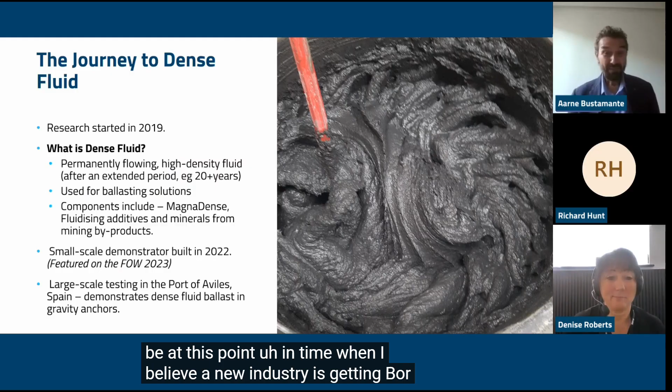It's really a pleasure to be at this point in time when I believe a new industry is getting born. I think in the energy industry, probably nothing is so attractive and has such high potential right now as floating offshore wind.

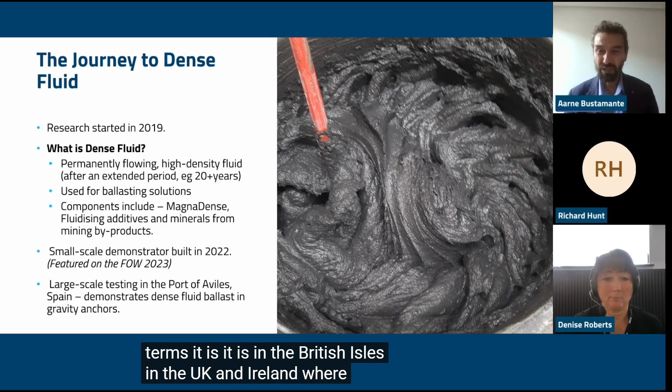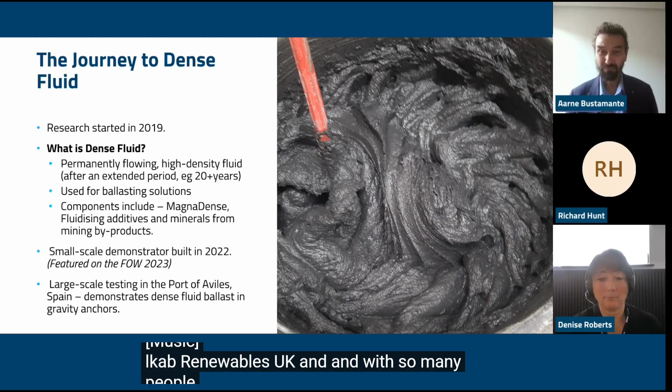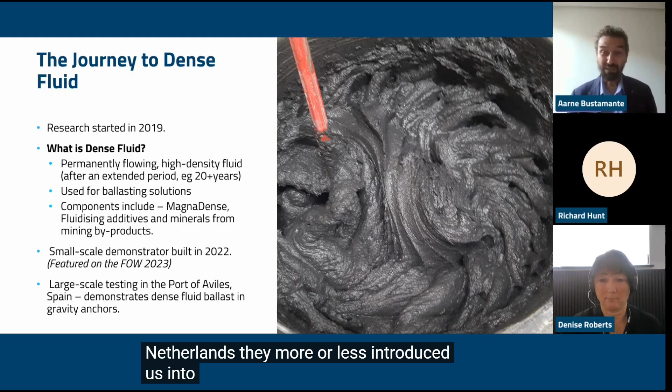I must say we have been in contact with LKAB since maybe 2018. Albert from Spain and Bas from the Netherlands more or less introduced us to LKAB. We have also been in contact with very many interesting people. Up there in Michigan, in the Upper Peninsula, Tim Scarlett is listening to this conversation, and he will probably be very interested because they have such great potential in Lake Superior, which will require floating wind. It's on a lake and not on an ocean, but still very interesting. So I'm really excited to be part of this.

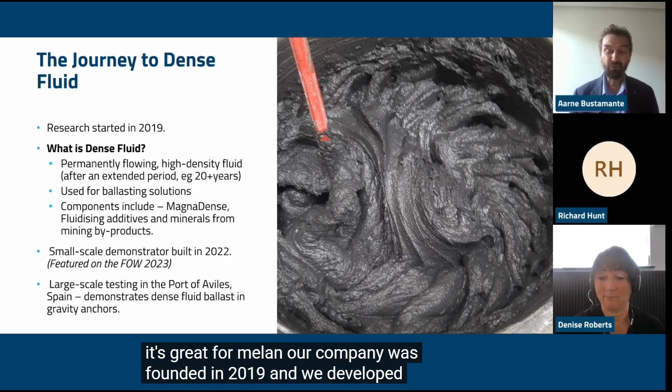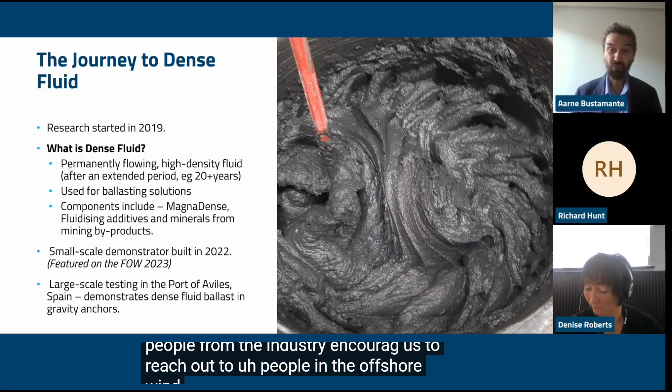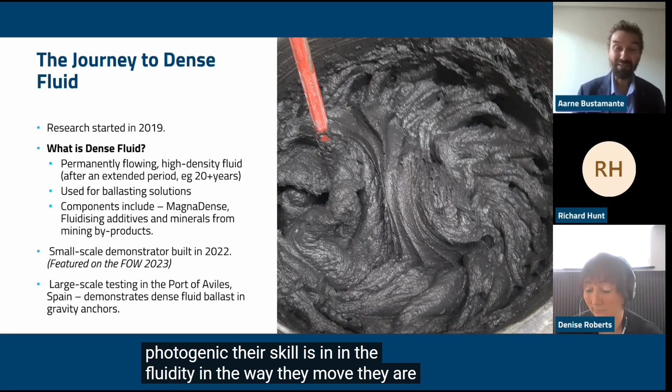It's great for Magellan. Our company was founded in 2019, and we developed dense fluids meant for something else, for energy storage. But people from the industry encouraged us to reach out to people in the offshore wind industry who could find a use for our dense fluids. There you can see an image of the typical look. I must say the dense fluids are not very photogenic. Their skill is in the fluidity, in the way they move. They are probably quite ugly, but they know how to dance.

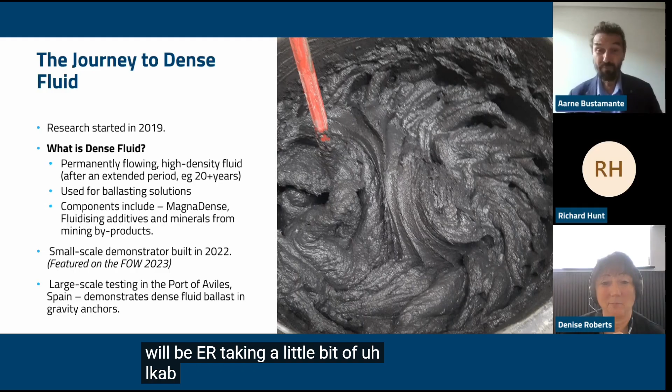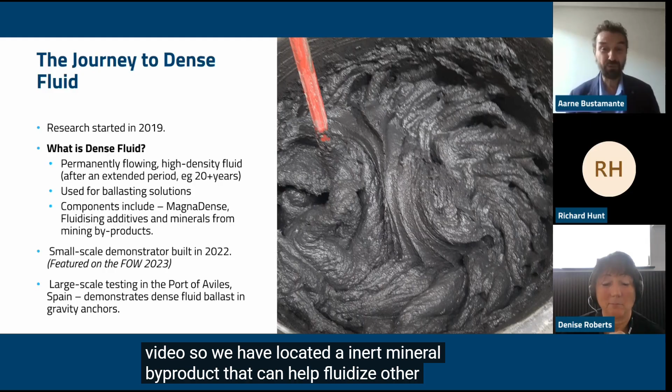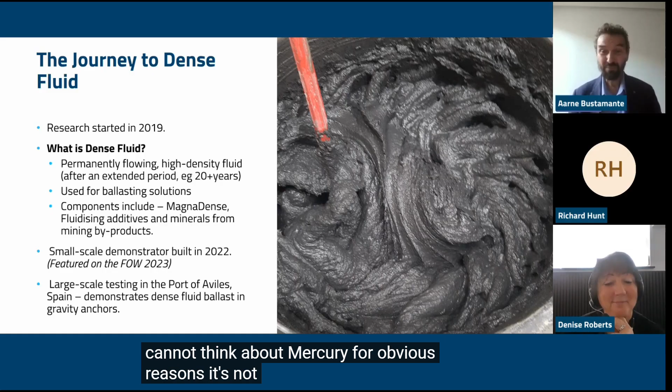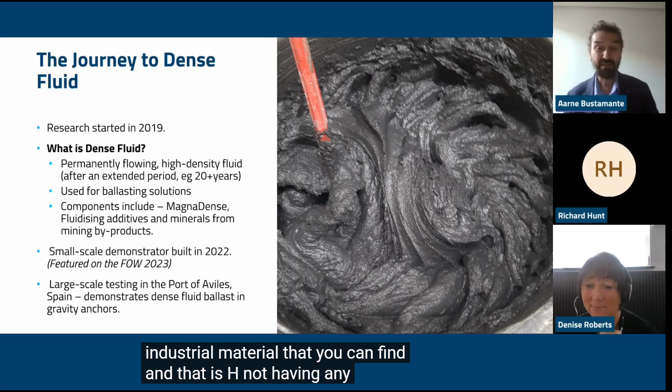So we have located inert mineral byproducts that can help fluidize other minerals that contribute density. Density and fluidity are a bit complementary. It's difficult to find a material that has both, except of course mercury, but we cannot think about mercury for obvious reasons. It's not an acceptable material. So of course, magnetite is a very interesting product because it's probably the densest highly used industrial material that you can find that doesn't have any environmental problems, because you can have lead or other heavy metals, but those are also not acceptable. So for us, it's very interesting to be able to fluidize the MagnaDense material.

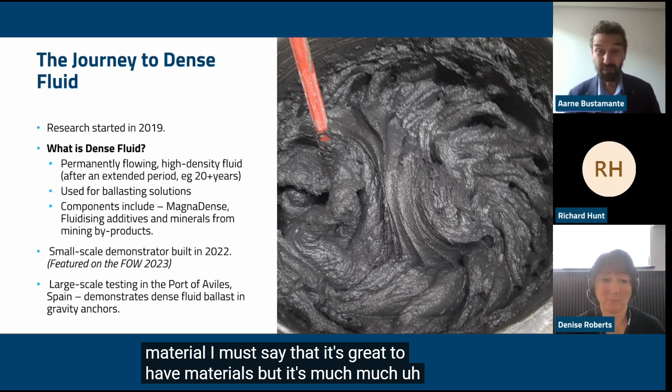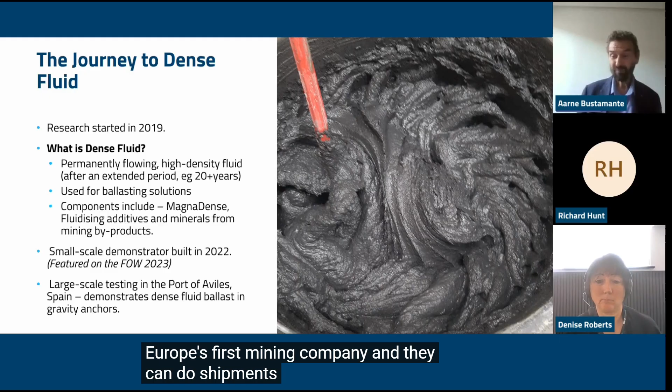I must say that it's great to have materials, but it's much better if there's a large mining company that's operating it, that knows how to handle the logistics. That's completely different. We actually have found some materials that could be good, but there's no mining company behind them, so you have to start from scratch with all the mining infrastructure, and that's a big headache and a lot of time and money. So we're happy to have found material that is very close to the port of Bilbao, and that means there will be a company that has already built the infrastructure and knows how to do the handling, much like LKAB. LKAB, of course, is Europe's first mining company, and they can do shipments anywhere. So we are at a happy spot because we can offer immediate solutions.

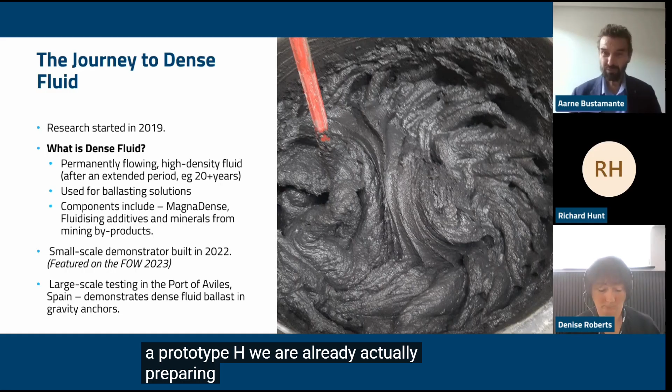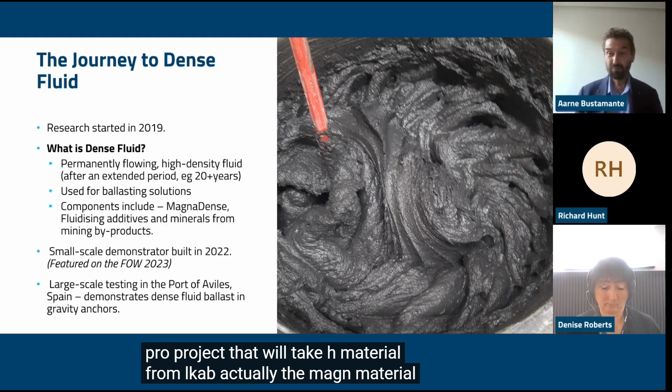If you have a prototype, we are actually already preparing shipments for next October that will go to the Canary Islands for an inner ocean project, and that will take material from LKAB, actually the MagnaDense material, that we will hold in place for 2 years and then extract as a fluid. So the first thing I want to make clear is this is already available. We still need to certify, we need to do some testing, but we can go into very serious discussions.

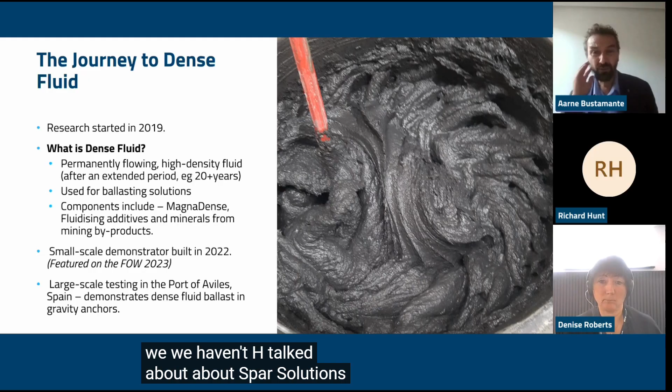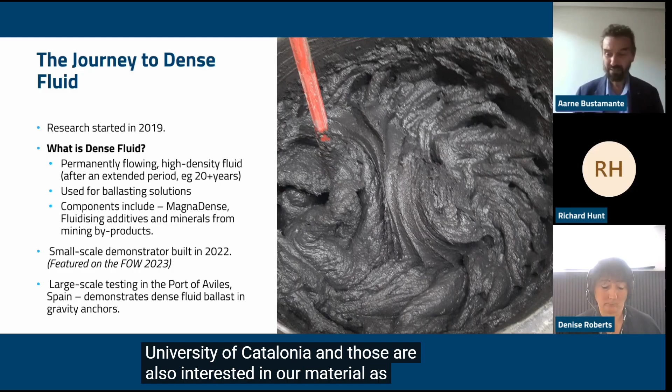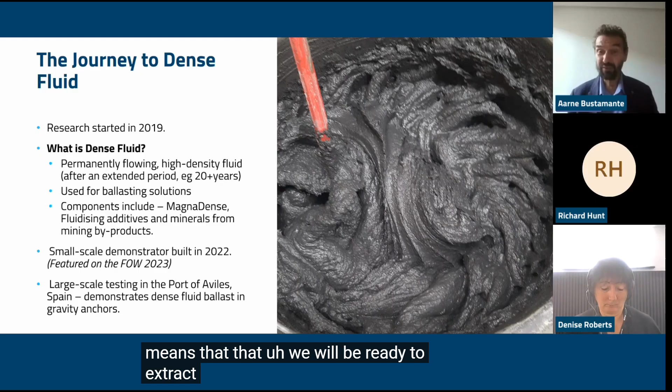We are, of course, very, very happy also to talk, for example, we haven't talked about spar solutions, but we are in contact with Windcrete and the Polytechnic University of Catalonia, and those are also interested in our material as ballast. I must say that when we talk fluidity, we mean, from our point of view, permanent fluidity. That means that we will be ready to extract the material as a fluid after maybe 20 years.

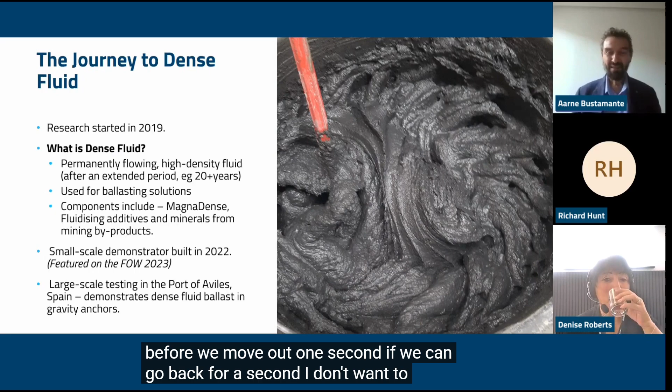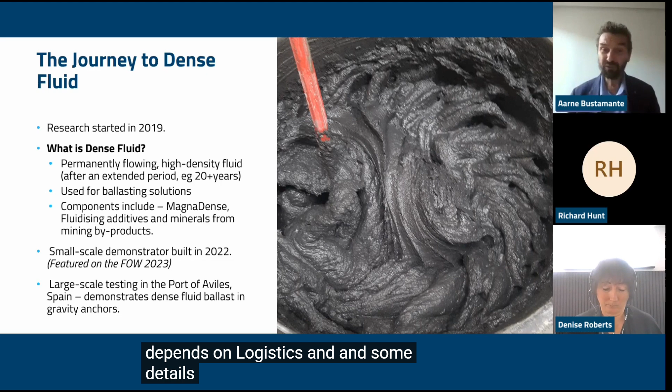And maybe we can move to the next, but before we move on, one second. If we can go back for a second, I don't want to forget: after the show in Aberdeen, we plan to do a large-scale demonstration in the port of Avilés in northern Spain. Maybe it will have to be in the Port of Bilbao. That depends on logistics and some details. But there we will try to demonstrate that we can install and extract material at 14-meter water depth in the port of Avilés.

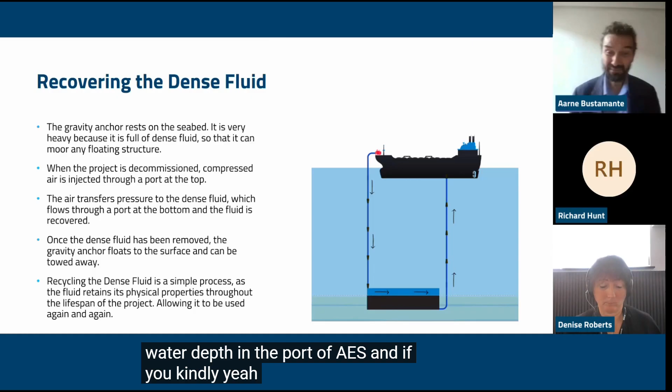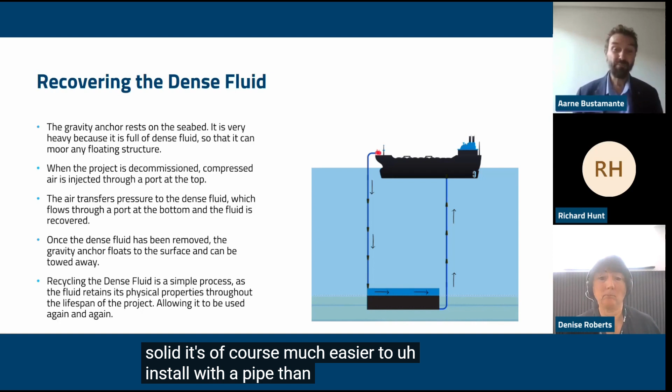And if you kindly, this is a drawing that explains what are the advantages of having a dense fluid instead of a solid. It's of course much easier to install with a pipe than use a marine crane, and it's also possible to use simply pressurized water or ideally pressurized air to bring back the fluid after the lifetime of the project.

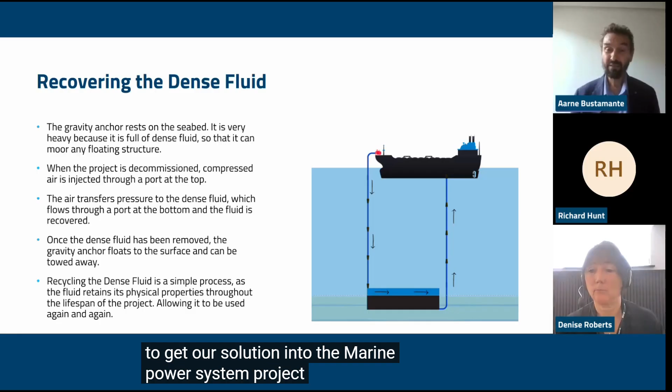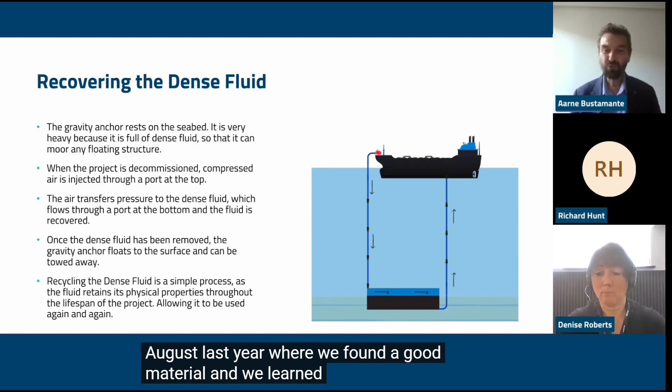I must say that we were trying to get our solution into the Marine Power System project that will be in Bilbao. That happened about April last year, and we were not completely ready. We made a breakthrough about August last year, where we found a good material and we learned to do the optimal blend. But we would propose maybe for future projects that a dense fluid is used instead of a solid.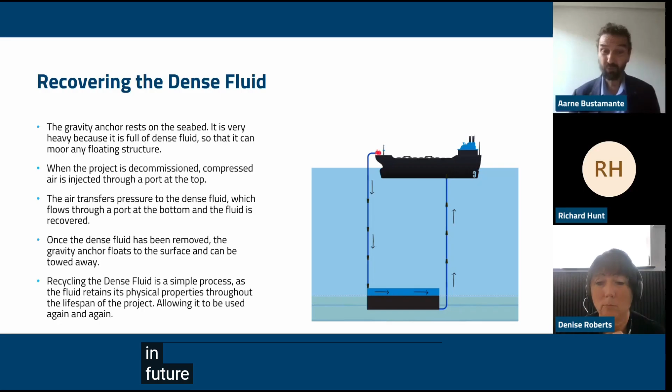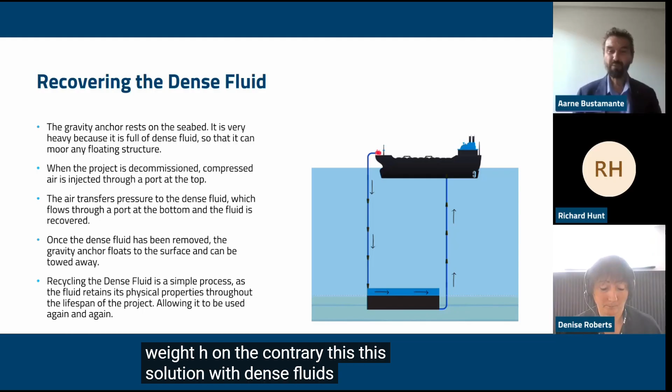Of course, the MPS project is a demonstrator at scale at 2 megawatts, but in future the turbines will be 15 or 20 megawatts. And that will make it probably a little bit more complex to use marine cranes to install the weights. On the contrary, this solution with dense fluids probably will scale much better because it's just a matter of pumping more time and of course more tonnage.

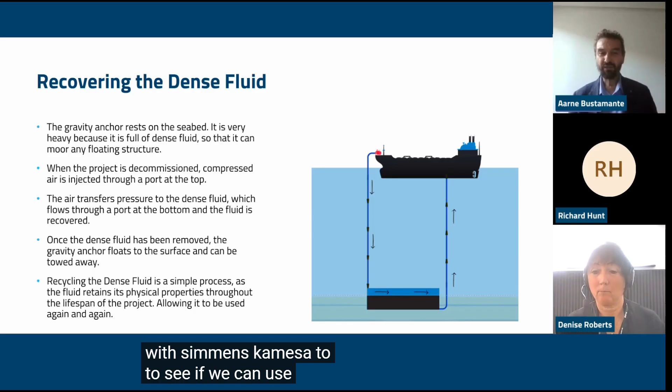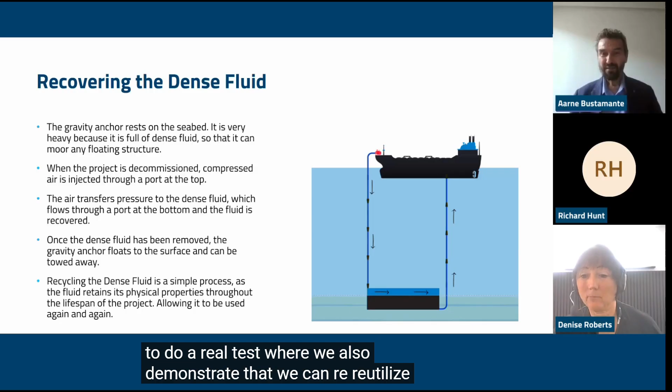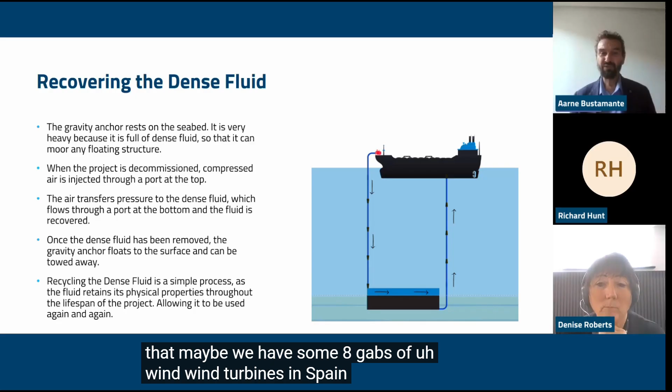So we actually are in contact with Siemens Gamesa to see if we can use one refurbished turbine tower segment from onshore to do a real test where we also demonstrate that we can reutilize segments of onshore wind turbines for this application. We have to keep in mind that maybe we have some 8 gigawatts of wind turbines in Spain that are approaching their end of life. So that will be many tower segments that are already built and ready to be used for other applications.

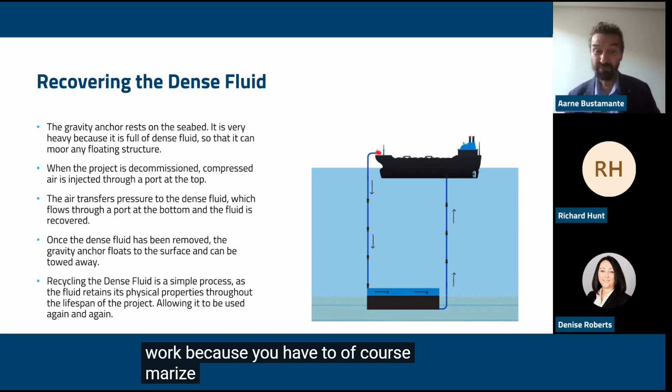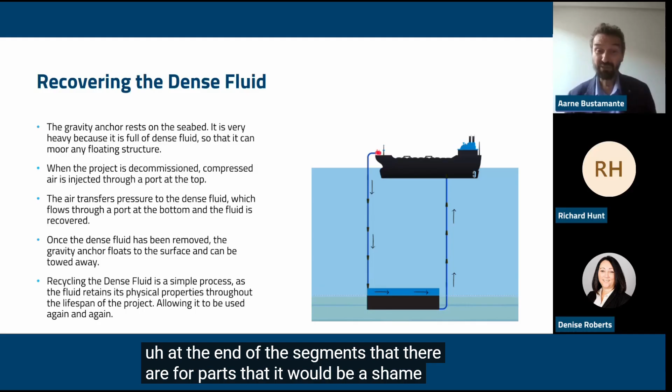It will take some work because you have to, of course, marinize the paint work, but that is possible, and the elements are attractive because they have very strong rings at the end of the segments. They are forged parts that it would be a shame to simply recycle as metal scrap. So maybe Denise, we can go to the next.

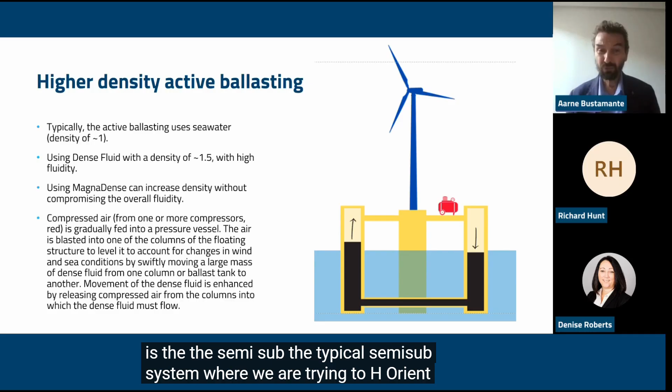We also want to show you a different concept. This is the semi-sub, the typical semi-sub system, where we are trying to orient the rotor of the wind turbine in a perfect position, so it will catch all the wind. The problem here is that any marine floating structure needs to be perfectly oriented, so that it will catch perfect wind. If you don't do that, you will probably lose about 2% of the wind power.

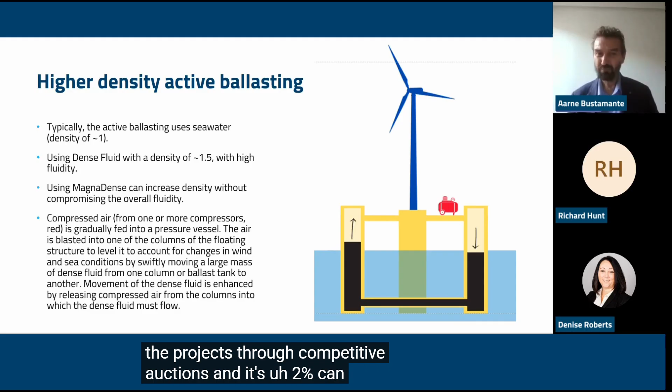That looks like very little, but you probably know offshore wind is very, very competitive. You get the projects through competitive auctions, and 2% can mean a lot because your margin is maybe 10%. So giving up 2% is 20% of the margin, and the financial department will not like that at all.

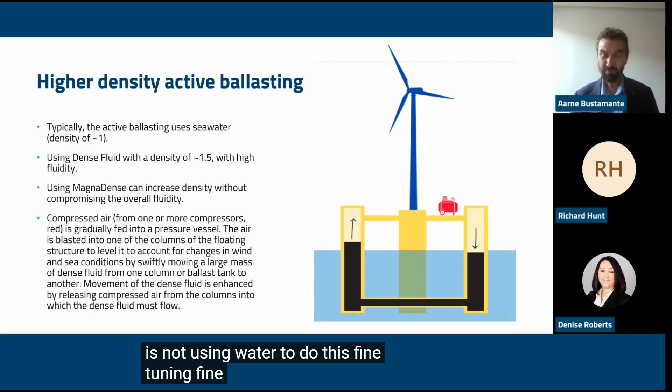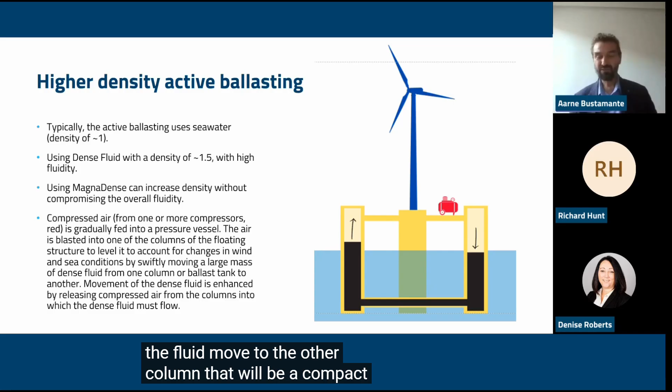So what we propose is not using water to do this fine tuning, fine balancing of the offshore wind turbine, of the floater, but use compressed air that would be injected in one of the columns and will make the fluid move to the other column. That will be a compact solution that is easier than using large pumps.

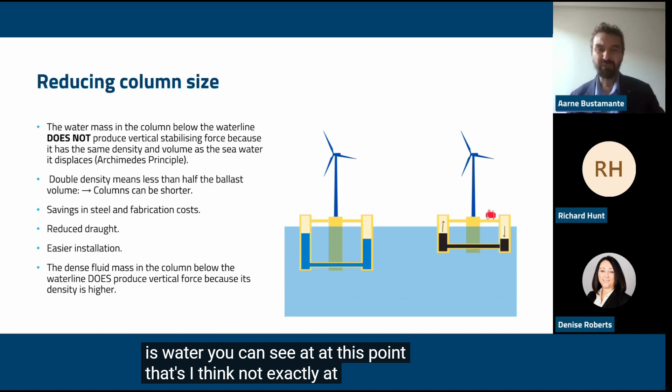With this, the comparison is water. You can see at this point, that's, I think, not exactly at scale, but quite representative of the diminution of the column size and the diminution in draft that you can get. Draft is very important because it makes it very difficult to work in ports.

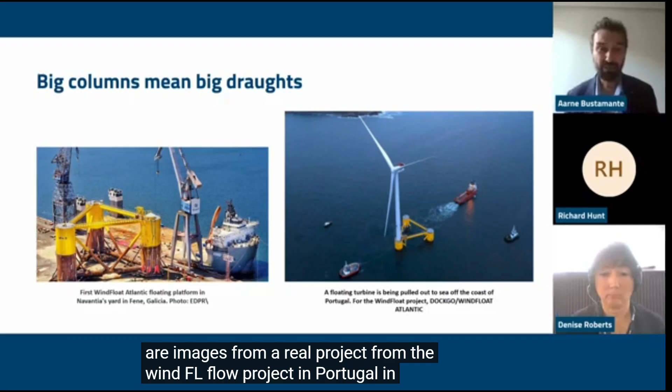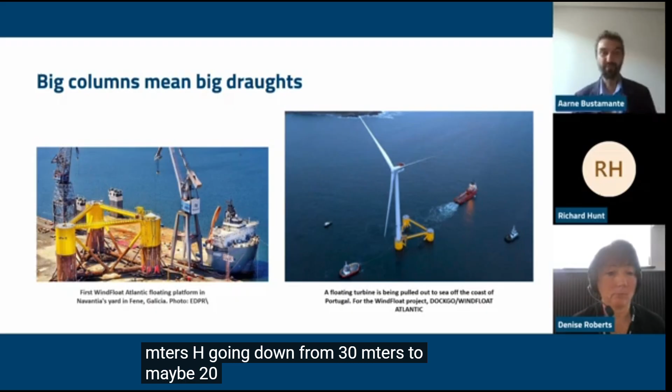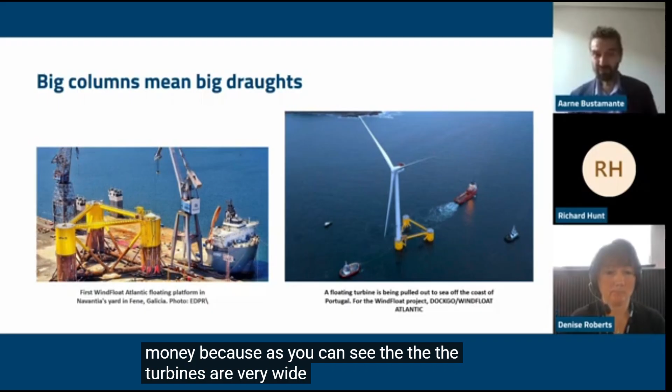These are images from a real project, from the WindFloat project in Portugal in about 2012. And you can see the large height of those columns. We are talking maybe 30 meters. Going down from 30 meters to maybe 20 meters means a lot of savings in, for example, dredging of the port. In the port, you will eventually have to dredge an exit channel, and that means a lot of money because, as you can see, the turbines are very wide. It's a lot of space, a lot that you would have to dredge.

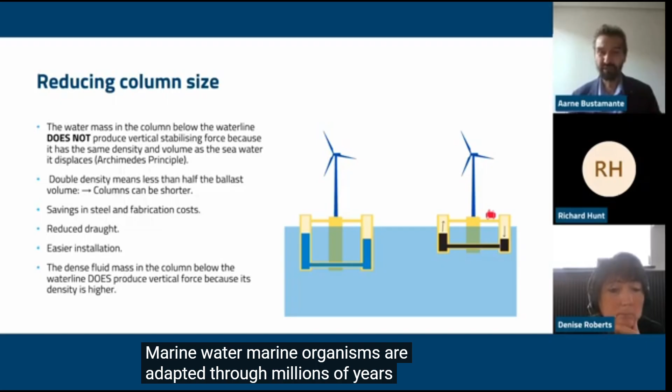There are other advantages of using this material instead of water. For example, you don't have the problems with marine water. Marine organisms are adapted through millions of years to live there. So you have to use biocides, which you can get rid of if you use these materials because they are not suitable for marine life.

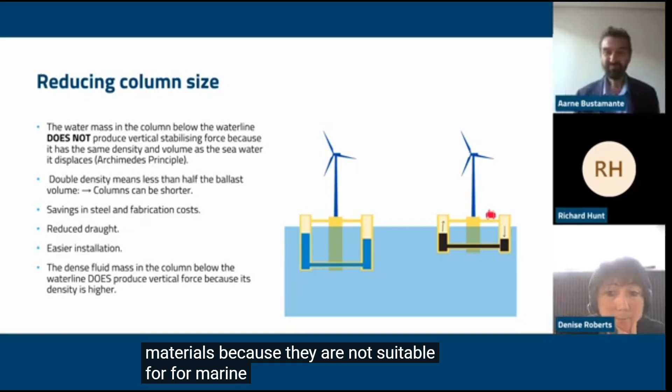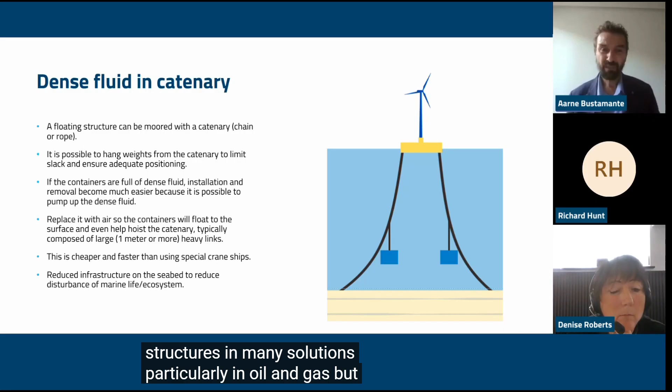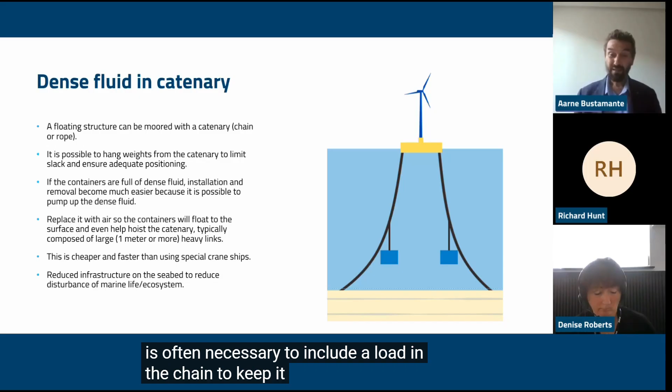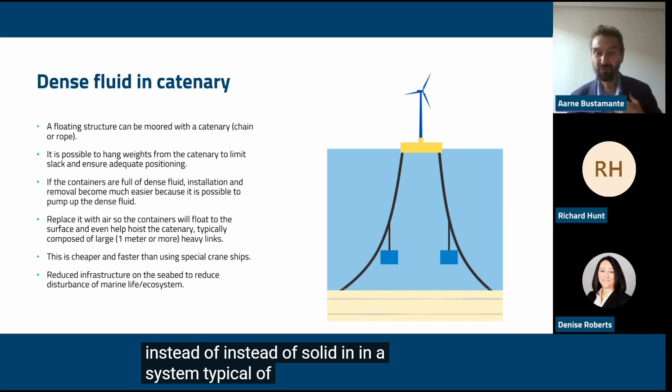Another application that we have in many structures, particularly in oil and gas, but also in some floating offshore wind prototypes. You will find catenary solutions with very large links, maybe 1.5 or up to 2 meter links, a very well-known and very used solution for mooring. It is often necessary to include a load in the chain to keep it taut, and it's much easier to retrieve the load if that material is dense fluid instead of solid, in a system typical of what we have found previously.

Just to finalize quickly, we'll be very happy to comment on any projects. Of course, you will always need to interact with technologists. We're always in a hurry because it's a large difference to reach a prototype manufacturer close to construction, when the final blueprints are approved for construction, or much earlier. So we encourage you to contact us as soon as possible.

Yeah, of course. So this innovation and this project that we are looking at should be really exciting for everybody. Simply getting material into a project, getting it back out to recycle that project. It is making everything, I'm not going to say easy, but easier than previously. So the whole concept of what we are trying to do with this project is very good.

This is a really exciting project, and we are all really keen to talk to people about the potential for future projects. What I would caution against is the assumption that we already know that this will come back out in many years' time. I just want to be clear that this has not yet been used in a live project. We have seen it after a few months. It's still fluid. When we do the next project in Spain, that will be out for a couple of years, and we will get more knowledge on that. But it's really exciting. Aarne is very confident that this will happen.